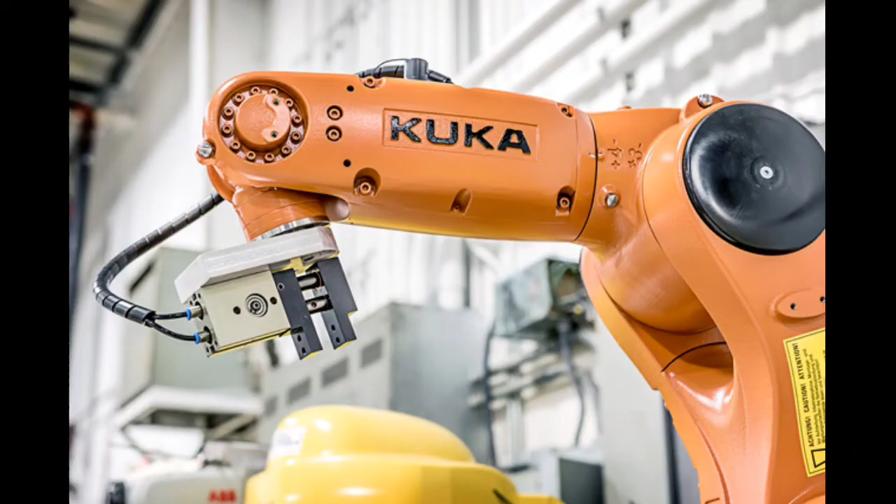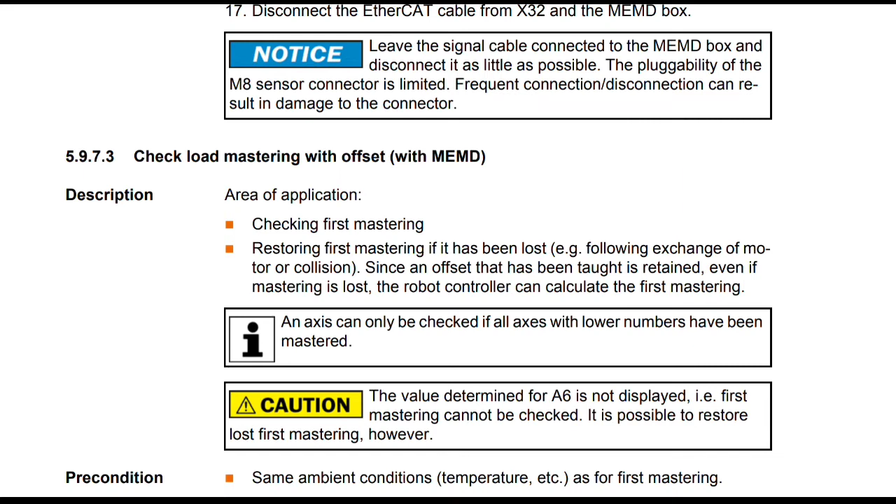Let's continue from check load mastering with offset using MEMD. Area of application: checking first mastering, or restoring first mastering if it has been lost. Since an offset that has been taught is retained even if mastering is lost, the robot controller can calculate the first mastering. An axis can only be checked if all axes with lower numbers have been mastered.

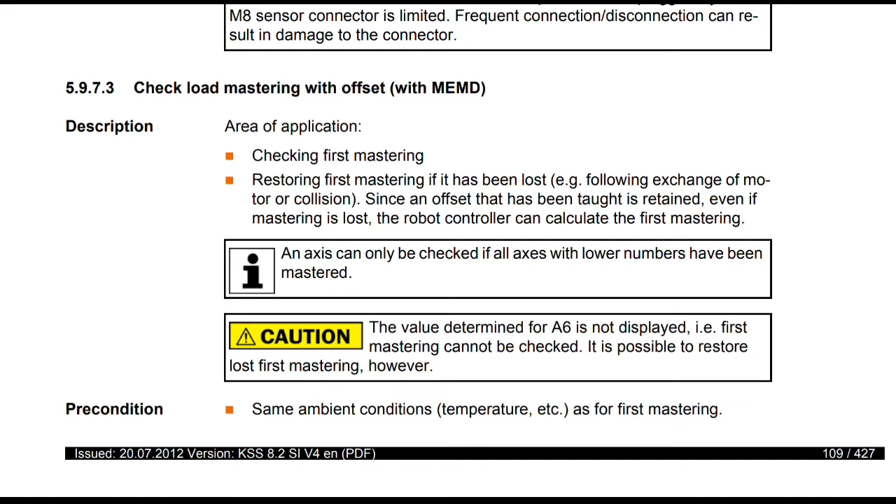Caution: the value determined for A6 is not displayed, so first mastering cannot be checked for A6. It is possible to restore lost first mastering, however.

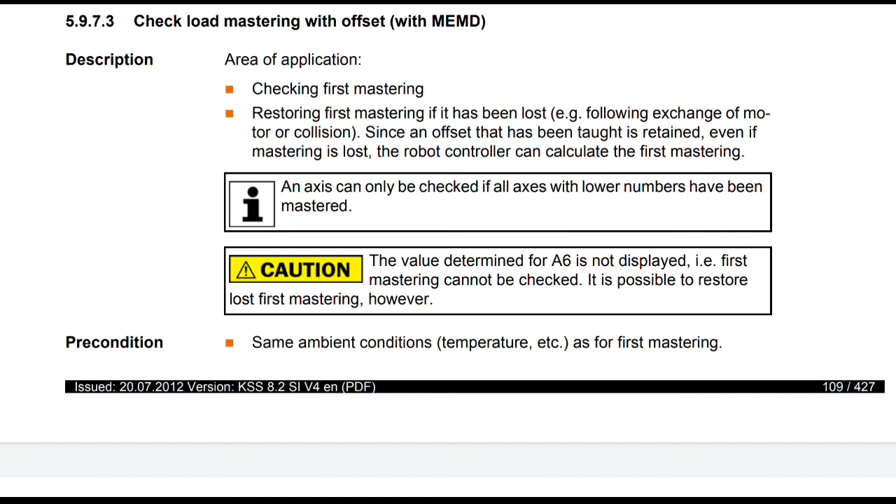Precondition: same ambient conditions, temperature as for first mastering. A load for which Teach offset has been carried out is mounted on the robot. A1 to A5 are in the pre-mastering position. No program is selected. Operating mode T1.

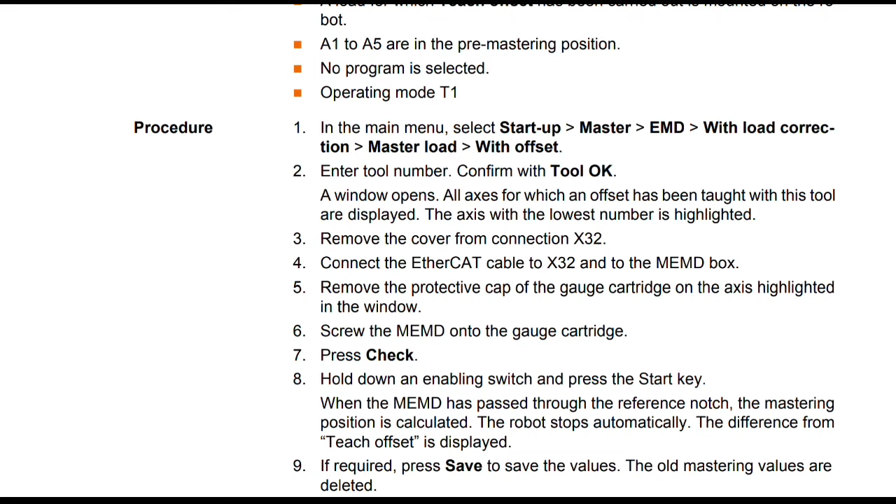Procedure: in the main menu, select Startup, Master, EMD with load correction, Master load with offset. Enter tool number and confirm with tool OK. A window opens showing all axes for which an offset has been taught with this tool. The axis with the lowest number is highlighted.

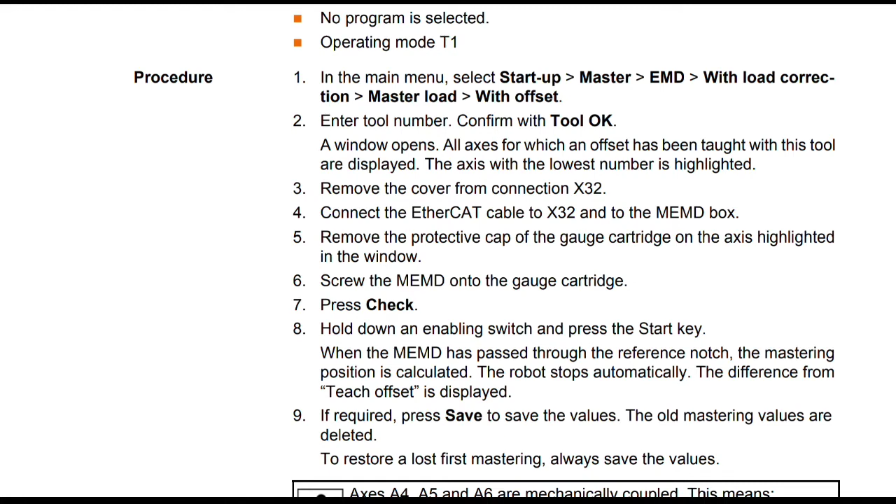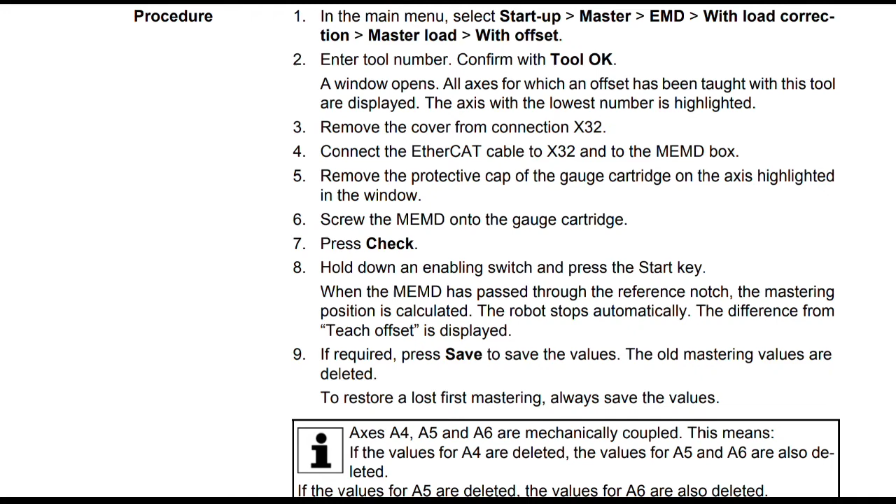Remove the cover from connection X32. Connect the EtherCAT cable to X32 and to the MEMD box. Remove the protective cap of the gauge cartridge on the axis highlighted in the window, then screw the MEMD onto the gauge cartridge.

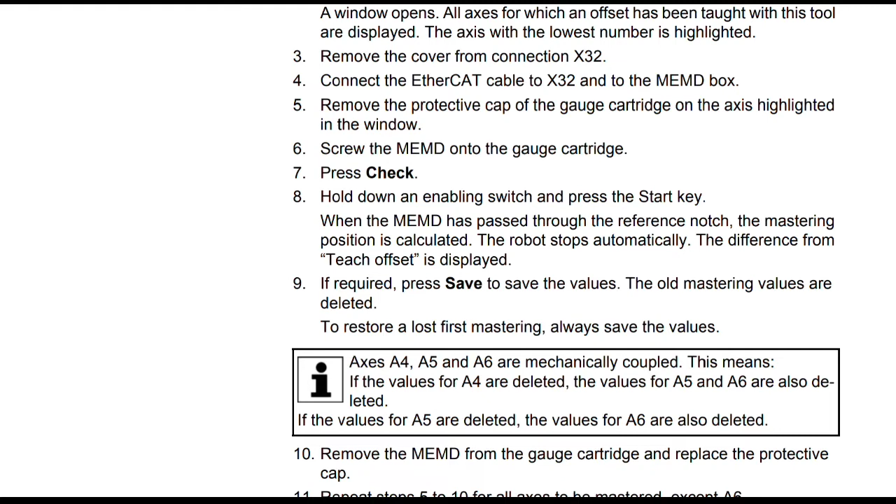Press check, hold down an enabling switch and press the start key. When the MEMD has passed through the reference notch, the mastering position is calculated. The robot stops automatically and the difference from Teach offset is displayed. If required, press save to save the values.

The old mastering values are deleted. To restore a lost first mastering, always save the values. Axes A4, A5 and A6 are mechanically coupled. This means if the values for A4 are deleted, the values for A5 and A6 are also deleted. If the values for A5 are deleted, the values for A6 are also deleted.

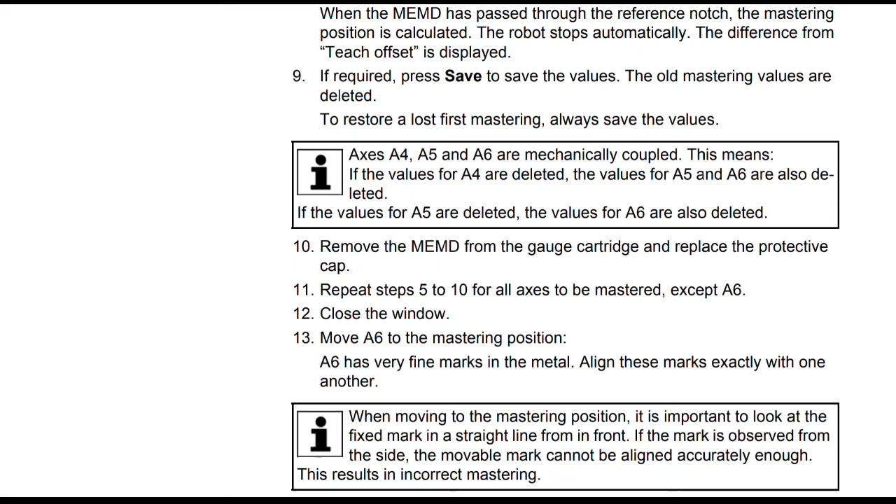Remove the MEMD from the gauge cartridge and replace the protective cap. Repeat steps 5 to 10 for all axes to be mastered except A6. Close the window, then move A6 to the mastering position.

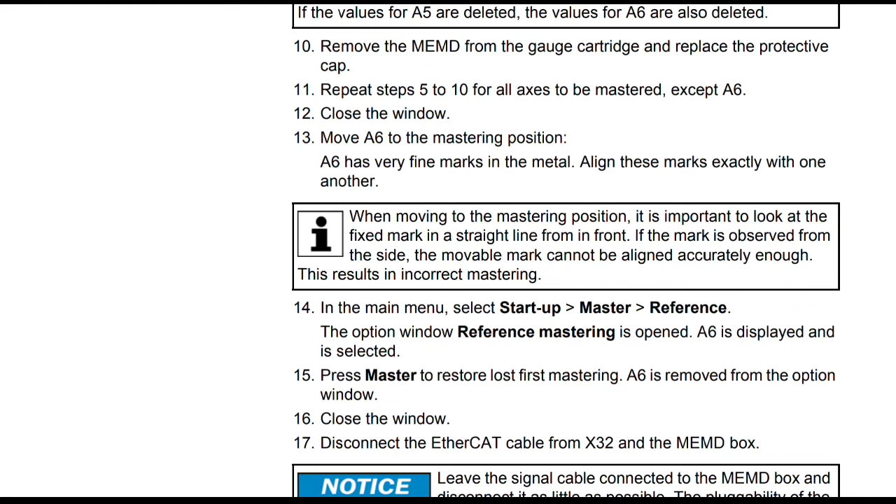A6 has very fine marks in the metal. Align these marks exactly with one another. When moving to the mastering position, it is important to look at the fixed mark in a straight line from in front. If the mark is observed from the side, the movable mark cannot be aligned accurately enough, resulting in incorrect mastering.

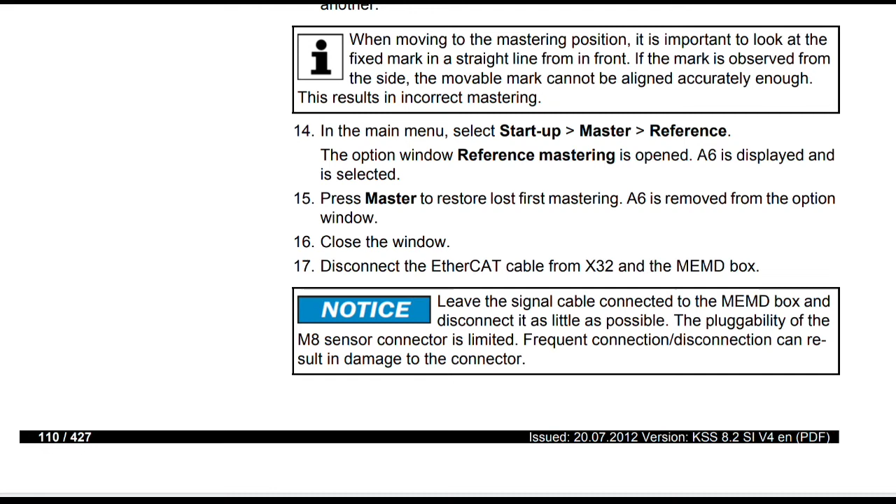In the main menu, select Startup, Master, Reference. The option window Reference Mastering is opened. A6 is displayed and is selected. Press Master to restore lost first mastering. A6 is removed from the option window.

Close the window and disconnect the EtherCAT cable from X32 and the MEMD box. Notice: leave the signal cable connected to the MEMD box and disconnect it as little as possible. The pluggability of the M8 sensor connector is limited, and frequent disconnection can result in damage to the connector.

Next is manually unmastering axes. Description: the mastering values of the individual axes can be deleted. The axes do not move during unmastering. Axes A4, A5 and A6 are mechanically coupled.

This means if the values for A4 are deleted, the values for A5 and A6 are also deleted. If the values for A5 are deleted, the values for A6 are also deleted. Notice: the software limit switches of an unmastered robot are deactivated. The robot can hit the end stop buffers, thus damaging the robot and making it necessary to exchange the buffers.

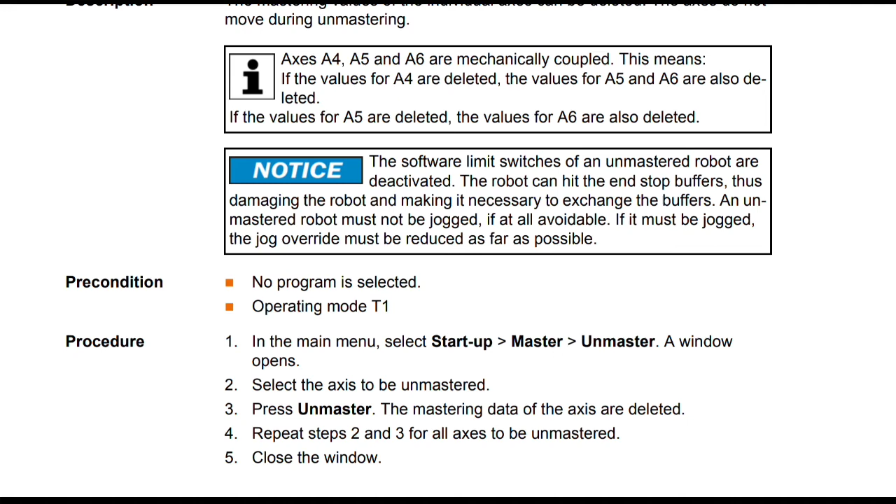An unmastered robot must not be jogged, if at all avoidable. If it must be jogged, the jog override must be reduced as far as possible.

Precondition: no program is selected, operating mode T1. Procedure: in the main menu, select Startup, Master, Unmaster. A window opens; select the axis to be unmastered. Press Unmaster and the mastering data of the axis are deleted. Repeat steps 2 and 3 for all axes to be unmastered.

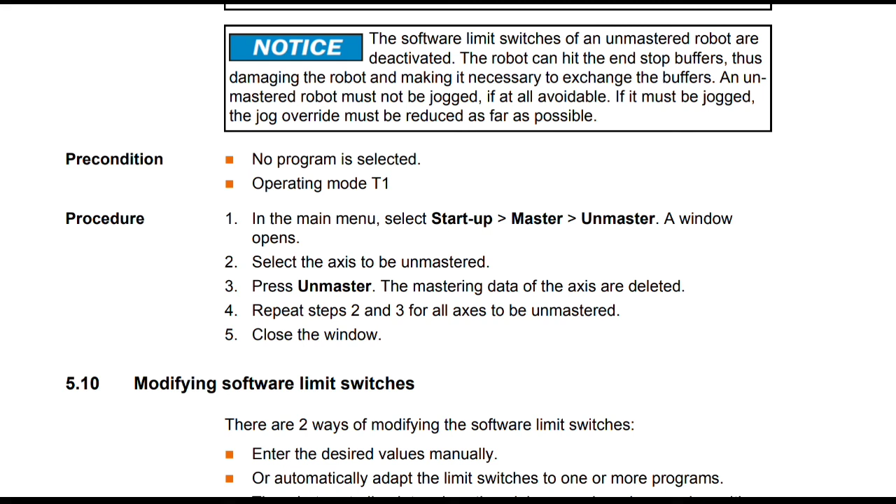Close the window. That's it for today's video. In the next video, we will continue from modifying software limit switches.